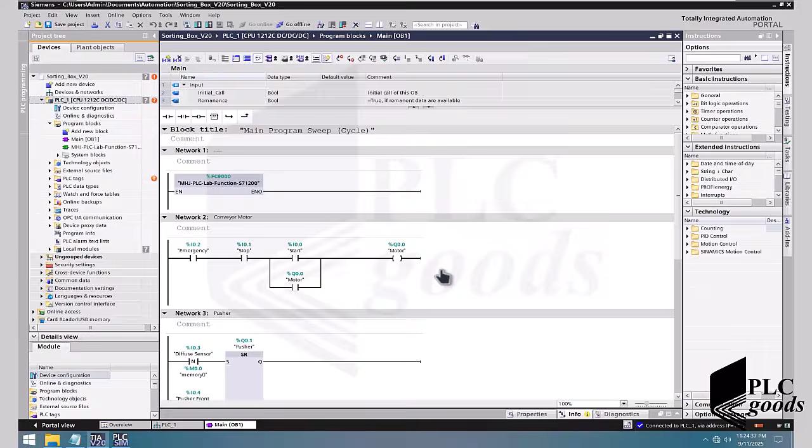I am excited to introduce to you my new course, Advanced Siemens PLC Programming with TIA Portal Masterclass. This course is designed for students and engineers who already understand PLC fundamentals and basic TIA Portal programming and are ready to move to the next level.

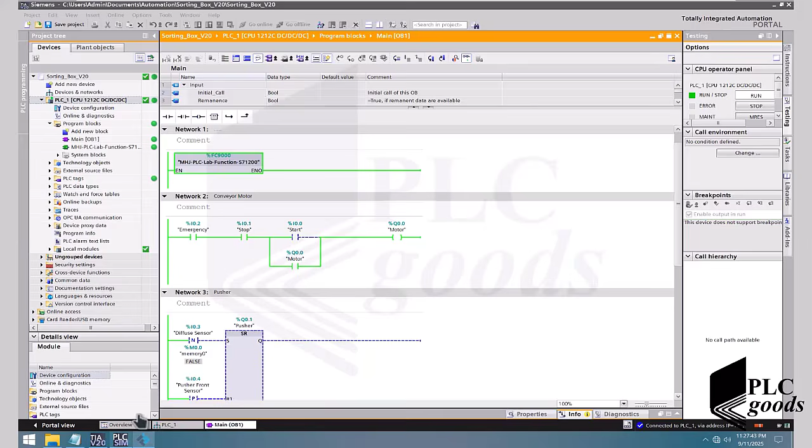The course narration, preparation of training materials, and testing of all practical projects were professionally carried out by my engineering teammate, Wahid, whose excellent work helped make this course clear, practical, and easy to follow.

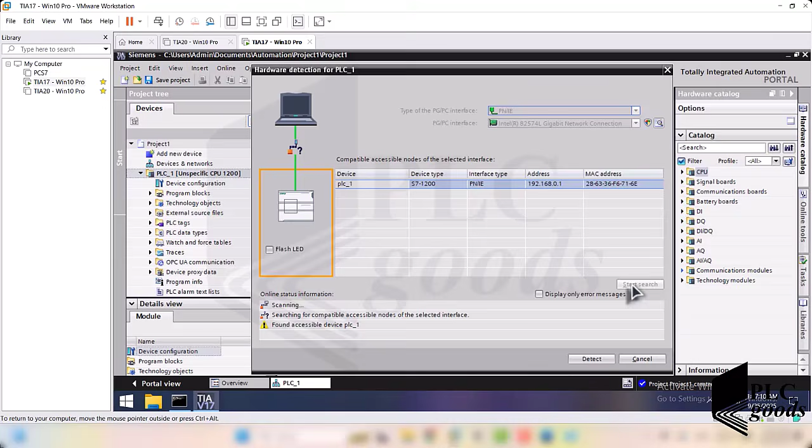During 16 practical lessons and nearly 3 hours of dedicated training, you will learn advanced techniques used in real industrial applications. We start with project migration and version management, including upgrading projects from TIA Portal version 16 to version 20 and running several TIA Portal versions on the same computer.

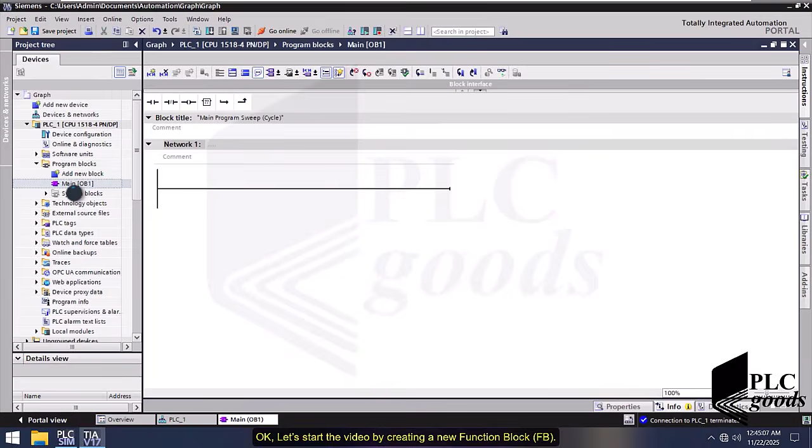You will then discover advanced data structures such as UDTs, data structures, arrays, optimized and non-optimized data blocks, I/O mapping techniques, and the powerful generic variable type.

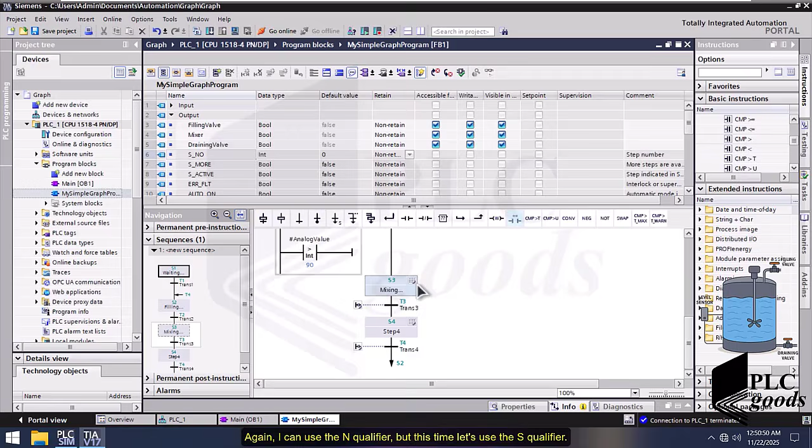The course also covers advanced programming topics, including OB80 fault handling, cause and effect matrix (CEM) programming, structured control language or SCL, and Siemens GRAPH programming by means of multiple hands-on examples.

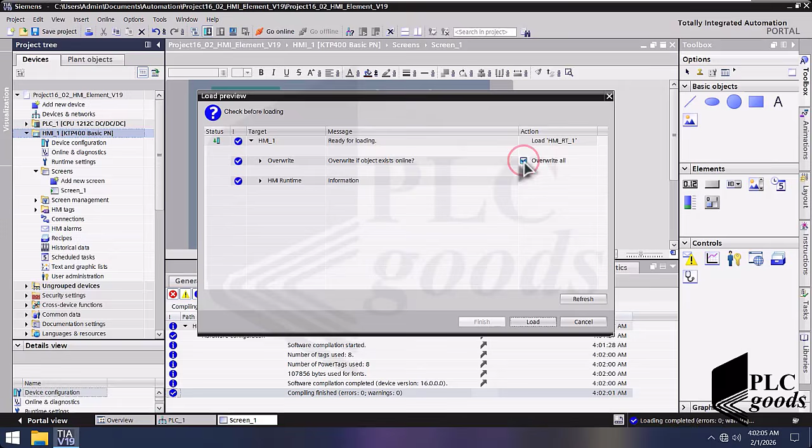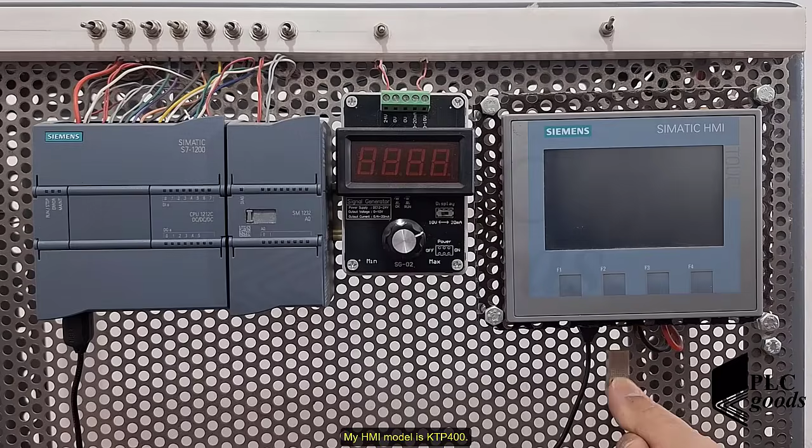In addition, you will learn how to avoid common PLC math errors by properly using Integer, Real, and LReal data types, perform real-time signal analysis with the trace tool, and manage Siemens HMI backup, restore, and USB project downloads.

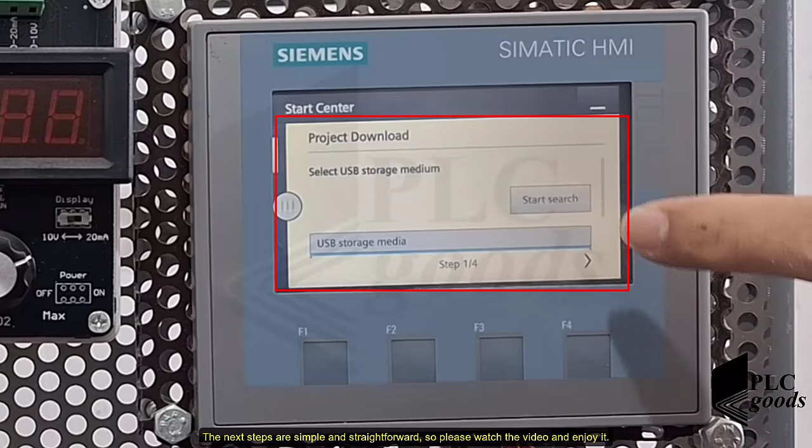If you are ready to enhance your Siemens PLC skills and learn professional programming techniques used in modern automation systems, I look forward to seeing you inside the course.